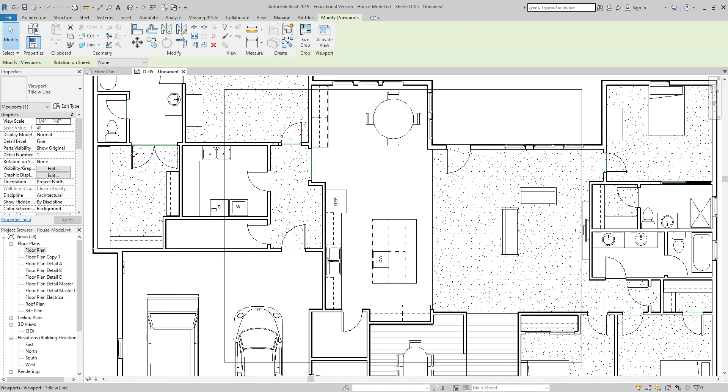I'm going to go ahead and grab my floor plan and drag this on, and click. It's way too big. I'm going to stay with my viewport - it's overlapping the page now. I'm going to change it to 1/8 to a foot. Everything we're going to do now is 1/8 to a foot.

I'm going to change it to have no title, and I'm going to attempt to fit it on the page. Mine does fit on the page, but just barely. I'm going to center it up so that I should have some space around on all sides, so my margins won't get cut off.

Okay, I'm now going to change this, the name, under sheets, so that it is A-01, because it is A-size paper, and this is floor plan. Since it doesn't have a title block, it's not going to put that anywhere, but it's going to help me keep track of what I've got.

Okay, if your floor plan will not fit on a single blank sheet, what you need to do is go to Sheets, click New, go to Load, and there should be an option for legal size blank. This is 8 by 14. So when I do that, you'll notice I get a much wider page. So that is your option 2 if your floor plan at 1/8 inch to a foot will not fit, also for your elevations.

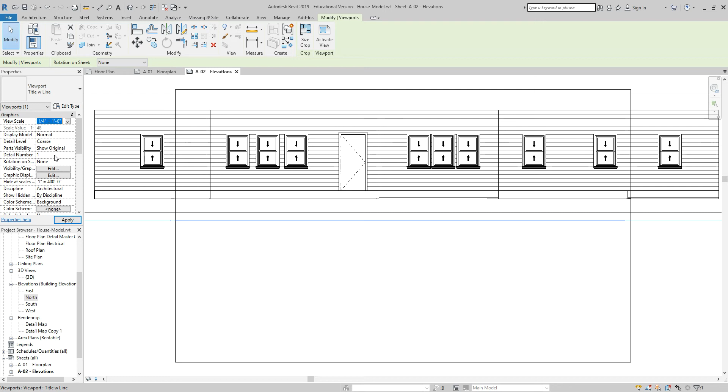If you fit on letter size paper, you don't need to make a legal version, but like I said, it's already created, so I'm going to use it. I'm going to now put my elevations north at the top. And again, I'm going to make sure I have this at 1/8 inch, like everything else, and no title.

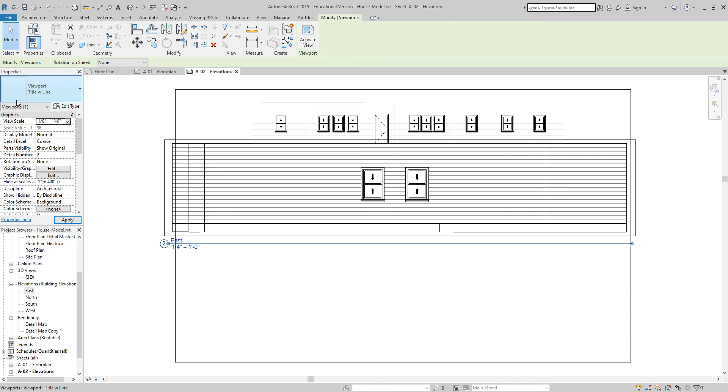It doesn't matter if the window hangs off. I just need to make sure that the actual elevation itself is completely enclosed. I'm going to do the same thing with all of my elevations - just bring them on, set them down, 1/8 inch to a foot, no title. Don't necessarily have to stagger them, but if it helps you fit them all in, you can.

I do wish the software would let us put more than one copy on a sheet, because this would make the next step easier. However, what we're going to do is set these up so that you can print it, so you get the majority of your exterior walls showing.

Now, we likely will have some bump outs, some walls that we don't yet have. I'll show you what I mean in a moment. We'll have to use some tools to get those walls showing, and we will have to print multiple copies of this sheet. Here's what I mean.

Right now, you can see all of my exterior walls, which if we look at my floor plan means I have the piece that goes here, and the piece that goes on this little chunk. But what I never see is this exterior wall right here, because as I'm looking at it from the east elevation, it's hidden - I don't see this at all. When I look at this wall right here from the west elevation, I don't see it either. So as I'm looking at this, I would print this sheet exactly like it is.

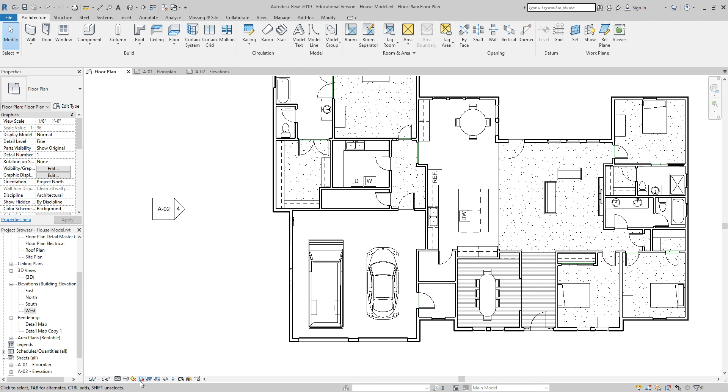And I would have to do that also for - I don't know why the whole category didn't actually come back. Come here. But we'll go ahead and reveal everything. All right, so there's something going on where I'm not seeing the other ones. However, I'll just go ahead and go back into it. That's what you'll do - you'll click on this.

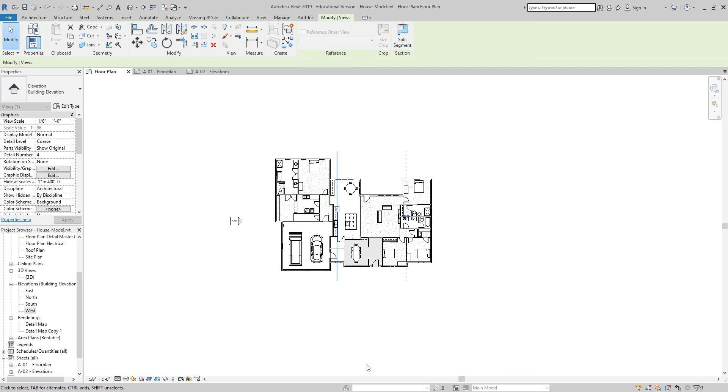I will actually need to do it for this gap as well, so I'd have to put this in this gap right here and then print it as well. Because again, I don't need any of this, but what I needed is this little chunk of wall right here.

Your teacher will give you directions after these sheets have printed as to what you should do to make sure you have all of the sheets.